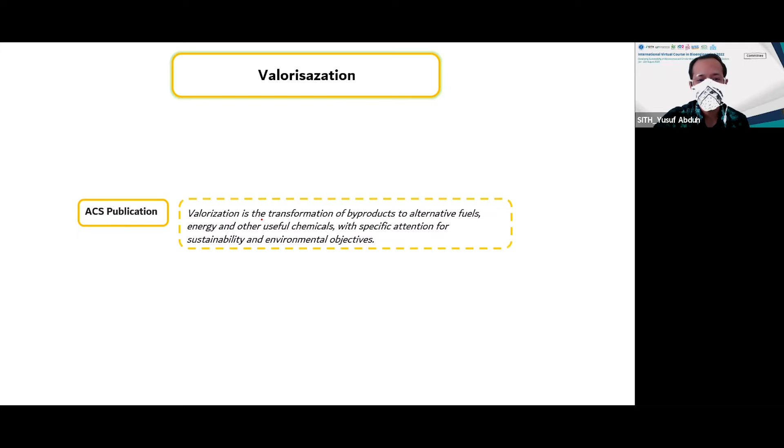It's very good. But the issue is, does it have to be waste? Or can it be other than waste? So the definition by ACS Publications: valorization is the transformation of byproducts to alternative fuels, energy, and other useful chemicals with specific attention for sustainability and environmental objectives. In a way, what Nurul mentioned, to increase the value, is good enough, but it doesn't have to be waste.

It can be, it's the terminology. You can call it waste, you can call it byproducts, you can call it co-products, you can call it also bioresources. So anything that you do by certain processes, biological processes, chemical processes, physical processes, any processes that can increase the value of that bioresource, you can consider it as valorization.

And we have to highlight that the main objective of valorization is to focus on sustainability and environmental objectives. It's not right that you increase the money value of that bioresource but then you are deteriorating the environment, polluting the environment. No. So valorization is increasing the value of certain bioresources with specific attention for sustainability and environmental objectives.

And that brings us to the essential core of this course, biorefinery. Biorefinery is an analog to oil refinery. All of you should be familiar with refinery. In an oil refinery, you have gasoline, you have many petrochemical products derived from the petrochemical industry. Now, for the past 10 years, we are replacing the conventional oil refinery with biomass resources, with biological resources. So we call it biorefinery. We are going to discuss it further.

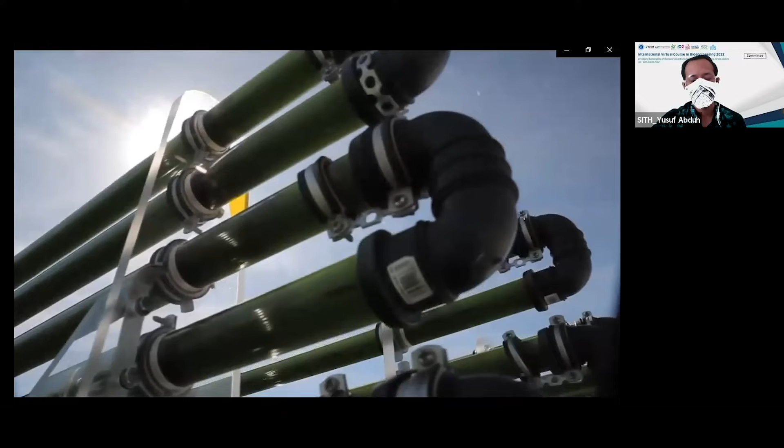We are not going to replace everything. We are going to do things in a different way, in a better way. A bio-based economy uses renewable raw materials instead of fossil resources. I think moving towards a bio-based economy and biorefinery is going to be the real big revolution of our future. Wageningen UR facilitates and accelerates the transition towards this sustainable future economy, which will deploy radically different production methods. Existing and new components for products will be made by a new type of factory. Living plants.

The way we make use of our raw materials and energy is not sustainable in the long term. So we are looking for a new balance where we can use our raw materials and energy efficiently and still create value. At Wageningen UR, we explore the potential of nature to improve the quality of life.

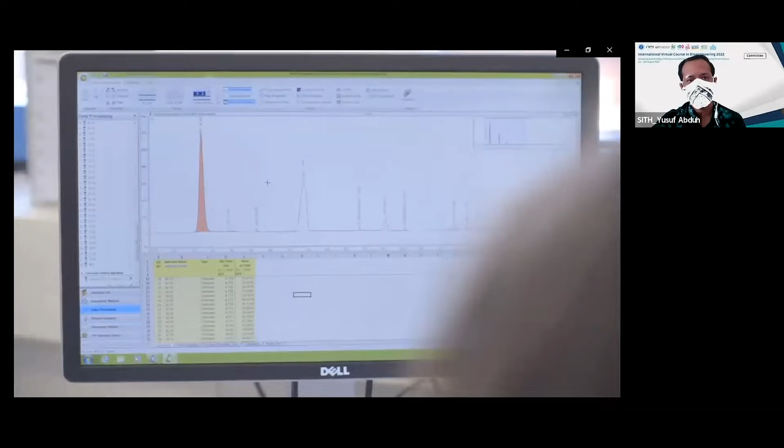Today, most crops are used for food and feed. This means that the plant biomass is not used to its full potential. What we are doing here is that the plant is composed of different components, and each of the components will be used for a certain processing. So we improve each of the components for the process that you are interested in.

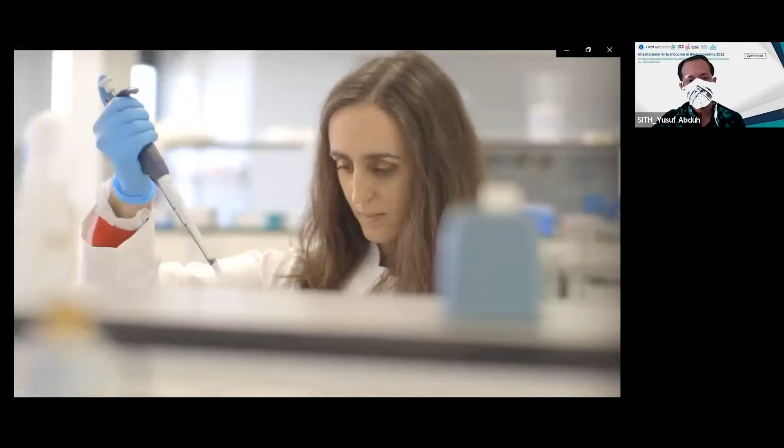There are, for example, fields of miscanthus. It's one of the bio-based crops that is a very high yielding crop. It can produce a lot of biomass with good quality. At Wageningen UR, we develop specific crops that are suitable for biorefining. Using the power of nature, we create the plants of the future. The chemicals, materials, energy, and food and feed.

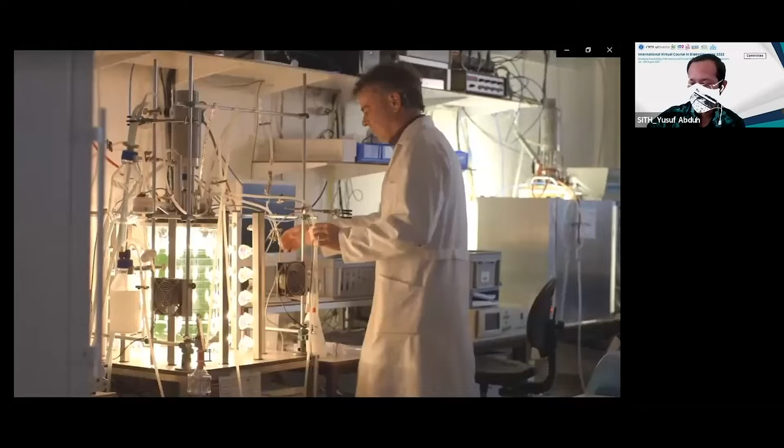Biomass is available from very different sources, in the form of trees, grass, but also waste streams. Biorefinery is important because unless you take the different components out of biomass, you cannot set them in again as raw materials for a different application. For different applications in the market, you need a more or less pure product. So you have to be sure that you separate these components from each other.

Wageningen UR covers a whole range of expertise related to the bio-based economy, expertise on sustainable biomass improvement and production, on bio-based chemistry, on knowledge of food and feed chains, and on economic models. When I think about 10 or 20 years down the line, then of course I think all the materials we're going to use will be very much based on a circular economy, and a lot of that on a biorefinery. I think really we'll see an important revolution that touches everybody's life quite soon, sooner than most people will expect.

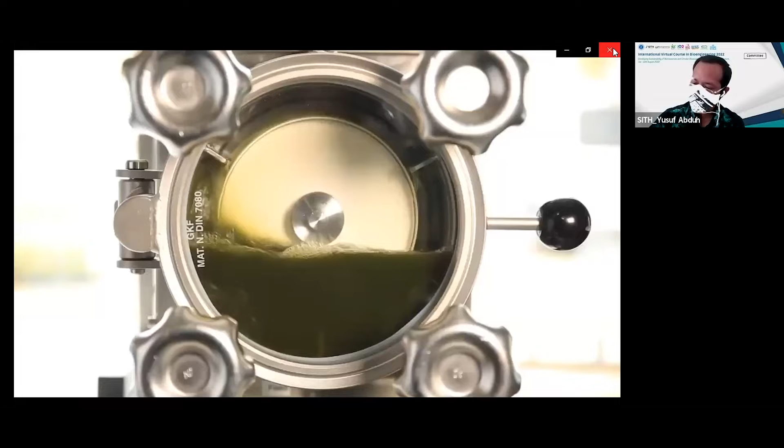Every day, we work with Dutch and global companies, governments and other research institutes. We innovate and develop new technologies in order to fulfill our mission, exploring the potential of nature to improve the quality of life.

All right, so that's around a 3 minute video. Anybody want to comment on that video? What have you heard? What have you watched? What can you take, or the important message from the video? Anyone?

I think, sir, as they are... Sorry, your name is? Firdaus. Firdaus from? From Kashmir, India. All right, Kashmir. All right, okay. So, as

they are propagating the idea of biomass. I'm talking to a lot of people. It's still a challenge for the industry, for people to shift from fossil fuels to biofuels. I've seen recently there are electric tuk-tuks in our society, but they aren't so popular because they cannot move through the rough terrains and all these things. So still the biomass commercialization doesn't go straight away. It's still following a blended economy where you have fossil fuel as well as your biofuels.

And then the problem is again for countries like India, Pakistan, many people sleep hungry. So there is always the food versus fuel controversy in biomass. There are a lot of challenges. It's a good initiative right now to focus on biofuel because the message is propagated that fossil fuels will finish soon, but how far is it sustainable? I still have a question mark on it, because if you look at heavy vehicles which use jet fuels or rocket fuels, there are very stringent requirements. So will biofuels be able to fulfill those demands? It will take time, sir.

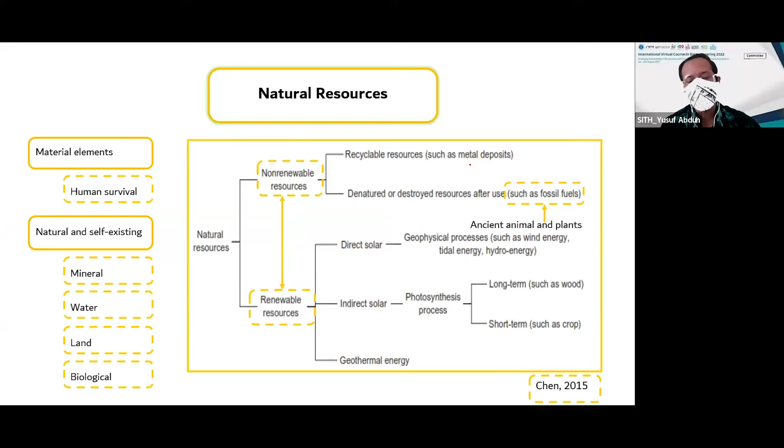Natural resources, I'm not going to talk much about this. You know that there are many natural resources. There are non-renewable resources, and there are also renewable resources. And there are many issues about this that you have discussed on so many occasions. We have exploitation. That's what one of you was mentioning about exploitation.

Yeah, but we also have to deal with excessive waste. Why are we not talking about the waste? Certain countries are facing terrible issues about this waste. How can we minimize the waste, and how can we valorize the waste? And then we also have so many issues about resource quality and how it can be a threat to human survival. If we don't deal with these issues, we are threatening the survival of our next generation.

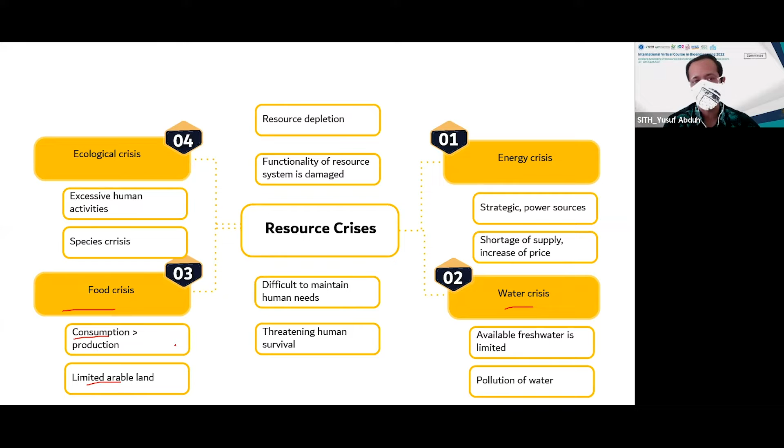We have an energy crisis, we have a water crisis, we also have a food crisis. Maybe in our country we have sufficient food, but we have to know that in other parts within our country or within other countries, there are people who are not having enough food. We have to deal with the issue that consumption is larger than production, and we have limited arable land. There are so many issues that you might have discussed on many other occasions.

And this is just to show you again the global challenges that we are facing: food, water, energy, and everything. And you also have heard about resource recycling. But I just want to highlight the objective of circular economy. Circular economy is related to economics, technology, system engineering, economic development, and environmental harmony. It's not just trading products. It's not just buying or selling products.

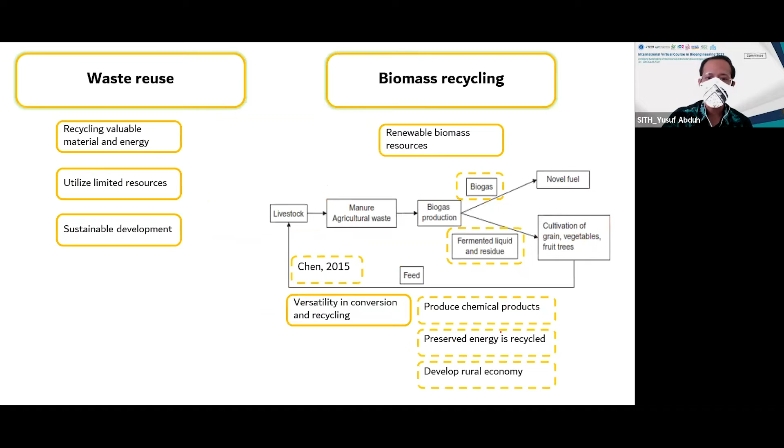Next is biorefinery. As we mentioned before, and some of you have also learned, biorefinery is a wide range of processes coupled for the production of bio-based products from different biomass feedstocks. As I mentioned, it is analogous to the oil refinery. There are four important keywords when you're talking about biorefinery, right?

So it's a very big plant. We have inputs and then we have products, or we call it output as well. So the key points that we have to optimize are the use of resources, the inputs here, and what the potential alternatives for the inputs are.

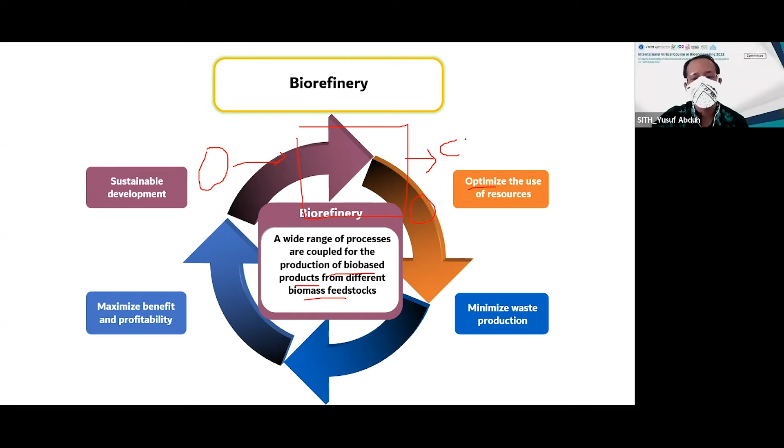We have to optimize the use of resources, and then we also have to minimize the waste, or what we call the byproduct, and then we also have to maximize the benefits and profitability. And all of this is to create a sustainable development.

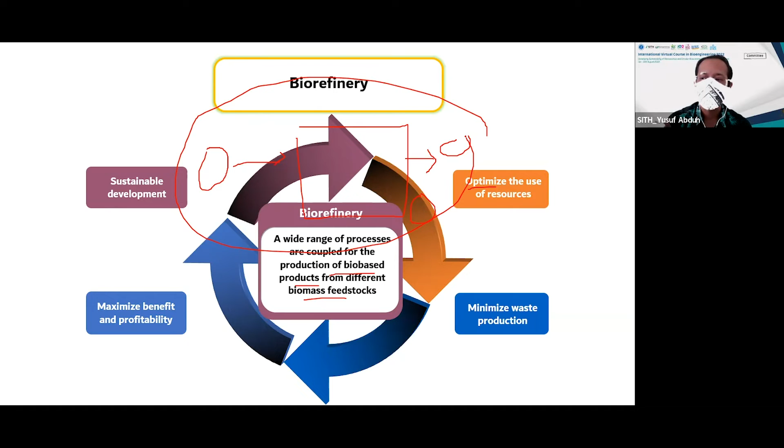There are many issues, yes. It is very challenging, it's a high cost. But let's discuss the concept first, and after we understand the concept, we try to look at what is happening in the industry at the moment and how the industry deals with this. Maybe what we know is not the same as what's happening in the industry. So let's focus on the concept, current application, then we can discuss relevant issues.

Biorefinery engineering, or bioproduct engineering, if you're talking about biorefinery I will show you the textbooks as well. We have different aspects: biorefinery feedstock engineering, biorefinery process engineering, and biorefinery product engineering. Again, we are discussing the concept rather than the issues.

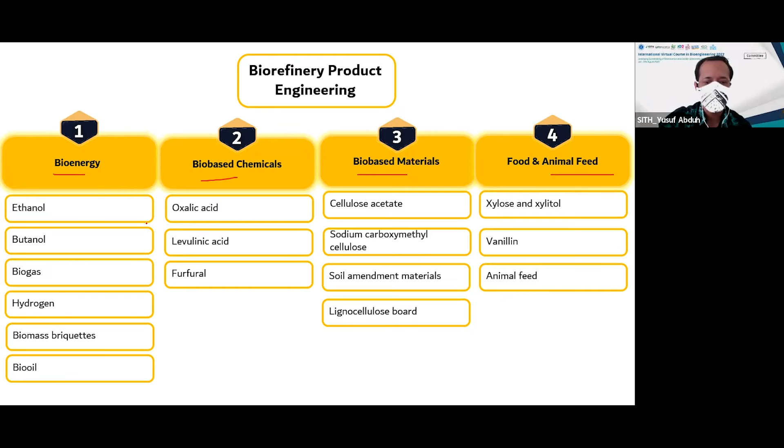We can discuss the issues later. It's very important. We're talking about biorefinery product engineering, and we're talking about bioenergy, bio-based chemicals, bio-based materials, food and animal feed in general. So you can choose, depending on the situation that you are facing. What is the problem that you are facing? Then you can choose this route of product.

And then we move to circular economy, having given a broad overview about biorefinery, and we know biorefinery is related to industry, and we have to talk about economy. Unlike linear economy that you might be familiar with, which is take, make, dispose. We take something from the environment, we make the product, and then we dispose of the waste. That's what we call linear economy.

But in circular economy, it is an industrial economy that promotes greater resource productivity, aiming to reduce waste and avoid pollution by design. So you have to design the process. Circular economy doesn't happen without intention. It has to be designed, and we have to take into account the material flows.

There are two material flows: technical nutrients and biological nutrients. Biological nutrients are designed to re-enter the biosphere safely. If you take everything from the plant, from the environment, and don't return it back to the environment, then there will be a deficiency of nutrients in the environment. So some nutrients, what we call biological nutrients, have to be given back to the sphere.

But the important key here is safely. You have to return it back to the environment. It's not fair that you take everything and don't give back. As a human being as well, when you take something, you need to give it back.

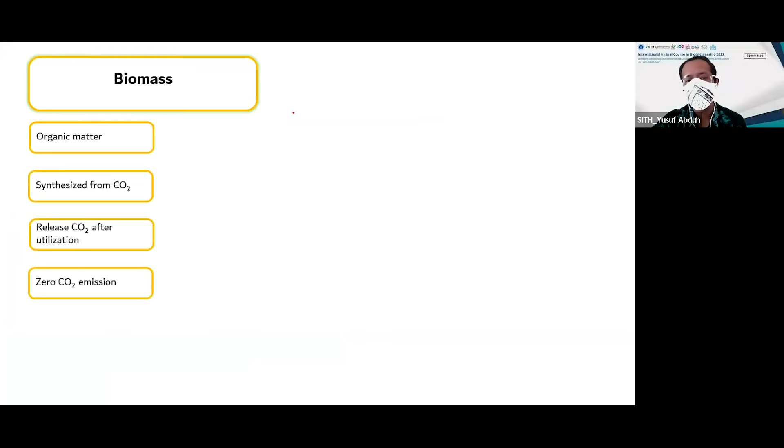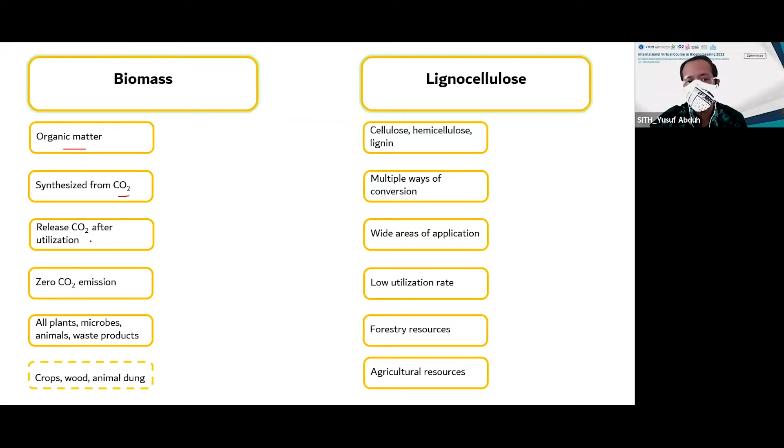So the main source of biomass - yesterday Professor Gill was talking about the source. One of the sources is lignocellulosic bioresources, lignocellulosic biomass, because lignocellulosic bioresources is the most abundant resource on Earth, available for us. But then there are also many issues about lignocellulose. Biomass is basically everything that contains organic matter, from carbon dioxide, but then it releases CO2, so it has zero carbon dioxide emissions. And lignocellulose is the most abundant resource on Earth, that's why many research efforts are focusing on it. But there are also a lot of issues - how can we deal with homogeneity and consistency of product when dealing with lignocellulose?

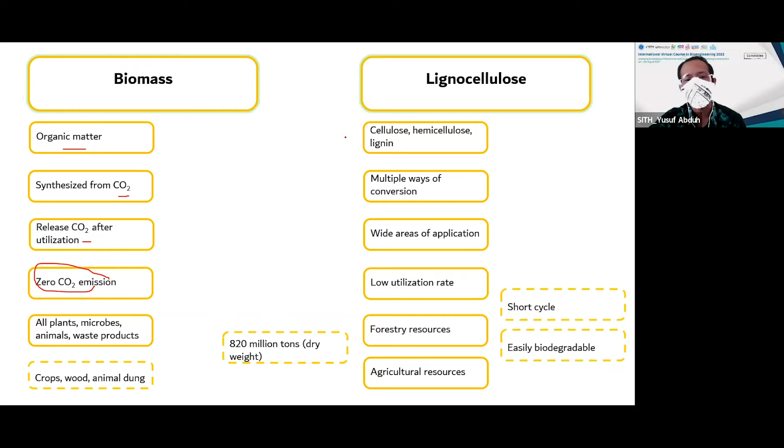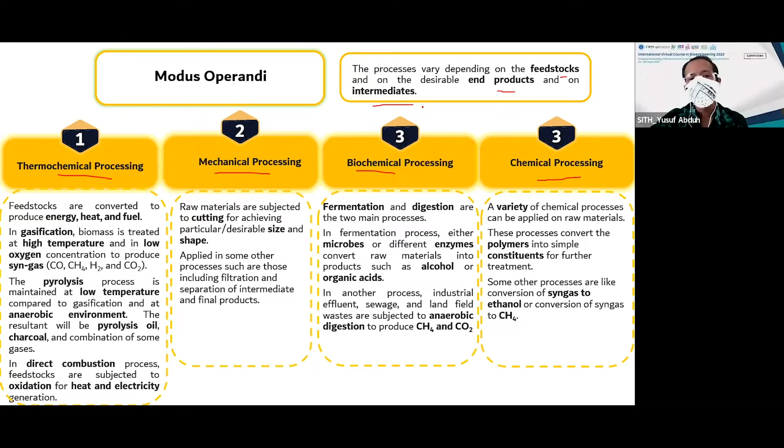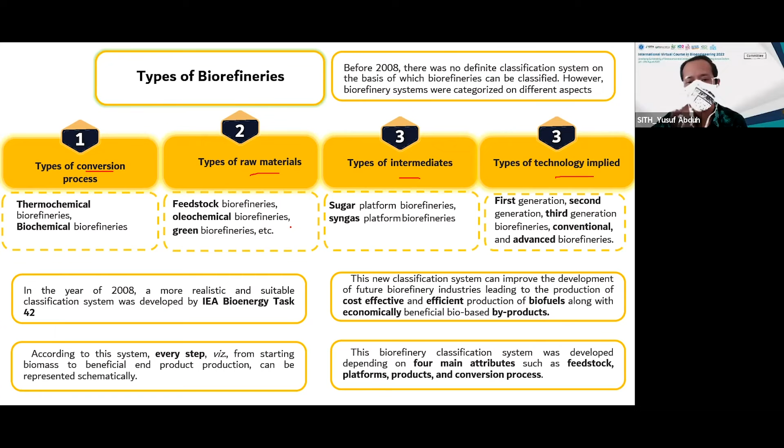Now we move to the modus operandi. We are talking about the biomass - how can we process it? It's the core of the biorefinery itself. We can use thermochemical processing, mechanical processing, biochemical processing, and also chemical processing. This is just to show you in general, it depends on the feedstocks, the end products, and also the intermediates. The type of biorefinery can be categorized by the types of conversion process, types of raw material, types of intermediates, and types of technology applied. So you can define or categorize biorefinery depending on these types. This may be familiar to you, for example with starch crops - these are the processes you can do for fractionation, then biological processing, and at the end we have the product.

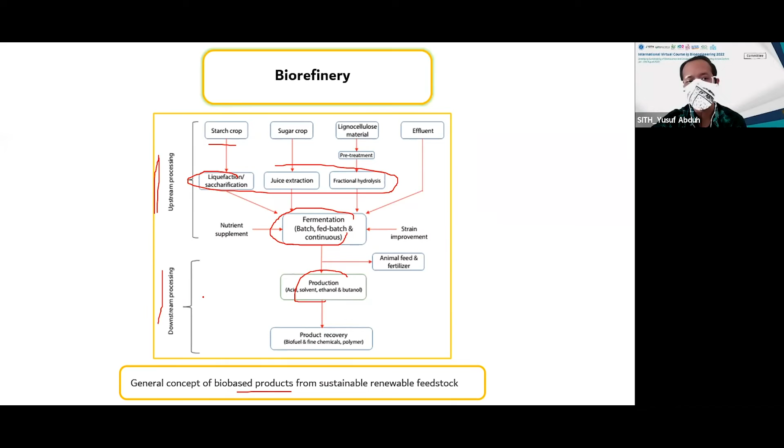So in general we have the upstream processing and also the downstream processing. This is a general concept of bio-based product from sustainable renewable feedstock, which can be categorized into upstream processes, dealing with the biomass and preliminary treatments, and then we have the processes. After the processes, we have downstream processing for separation and purification to obtain the final product.

Any questions so far?

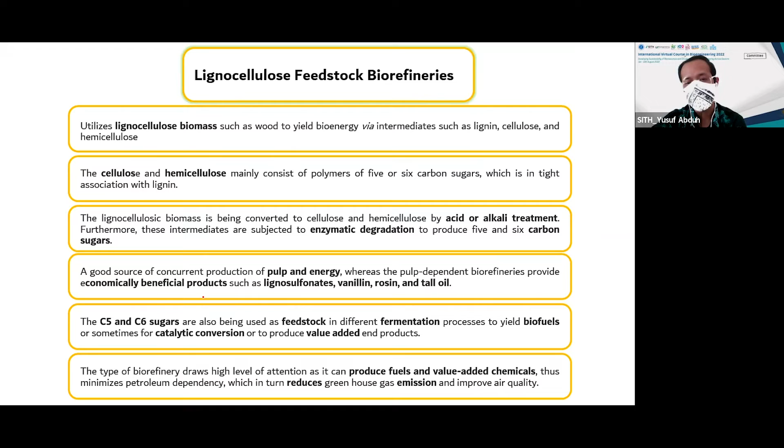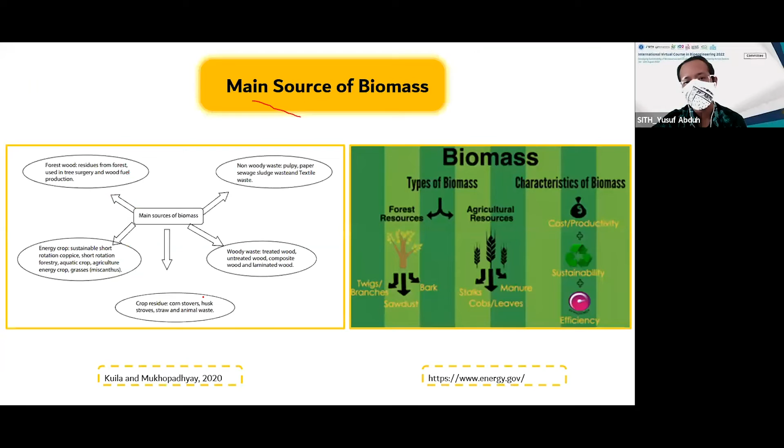Sir, I would like to discuss the concept of circular economy, specifically in the bio industry. As we know, circular economy is about responsible production and consumption, as promoted in SDG number 12. We do this considering the life cycle of the product - it's a circular cycle, not a linear economy like the traditional one we may use.

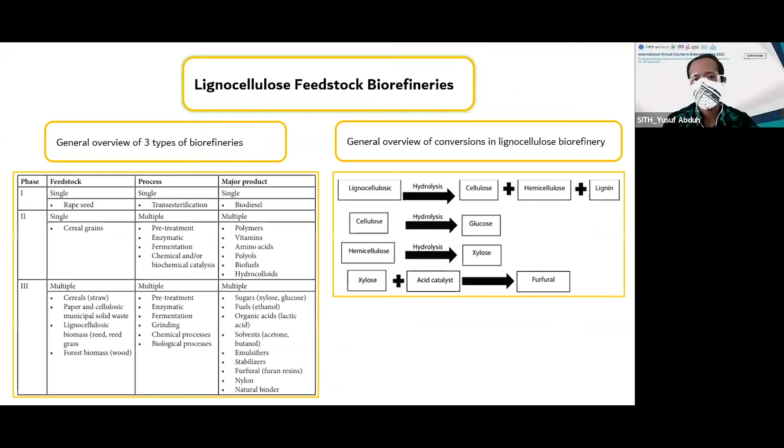Talking about the process just now, we stop here, and we have this lignocellulosic biomass. I'm not going to discuss this because Professor Gill has given a very thorough discussion about lignocellulose. But why? Because lignocellulose is the most abundant resource on Earth right now.

Apart from the lignocellulose biorefinery, we have the syngas platform biorefinery. Syngas mainly consists of carbon monoxide and hydrogen. How can we use fermentation?

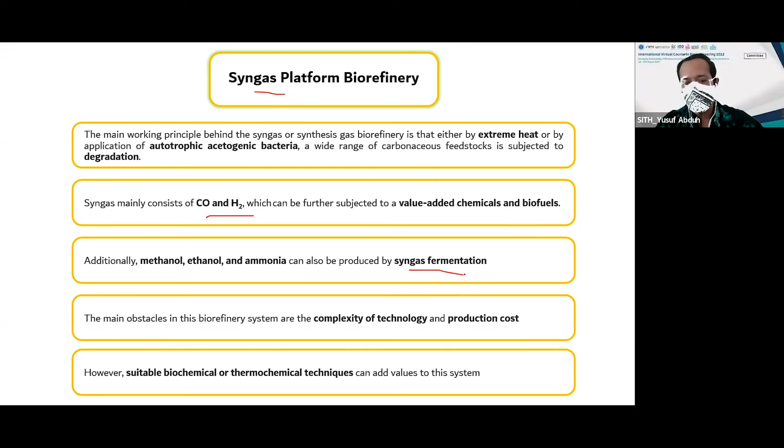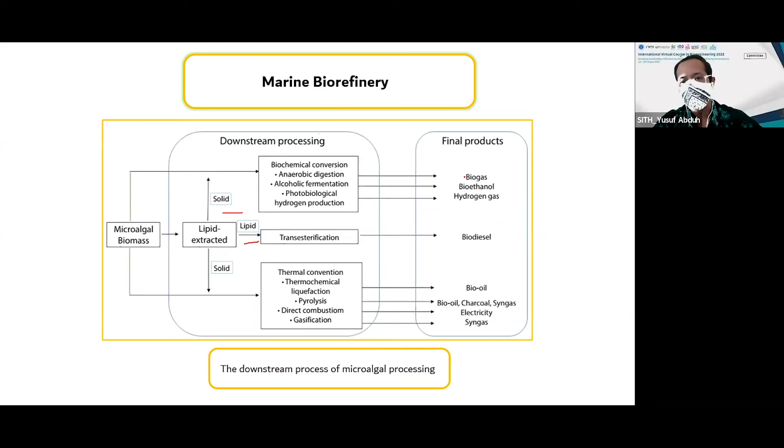So this is just an example, the microalgae biomass - we have the extraction process, and we have the solid, we have the lipid, and these phases can have different processes leading to different final products. This is just a concept, and later I will show you companies that have done this in real.

We have also here this oleochemical biorefinery, so these are producing oleochemical products.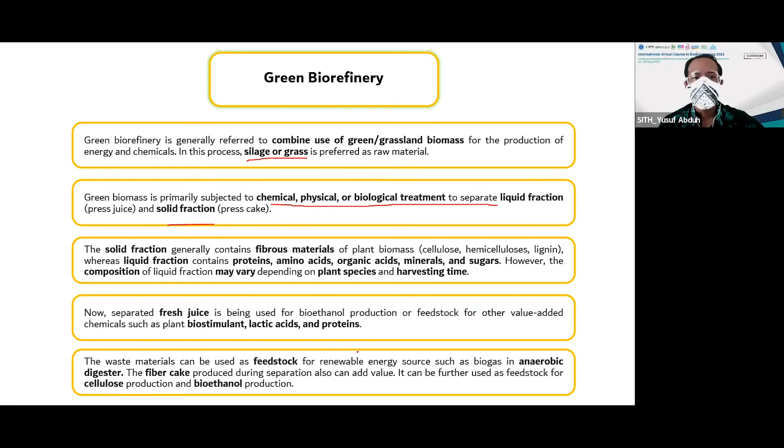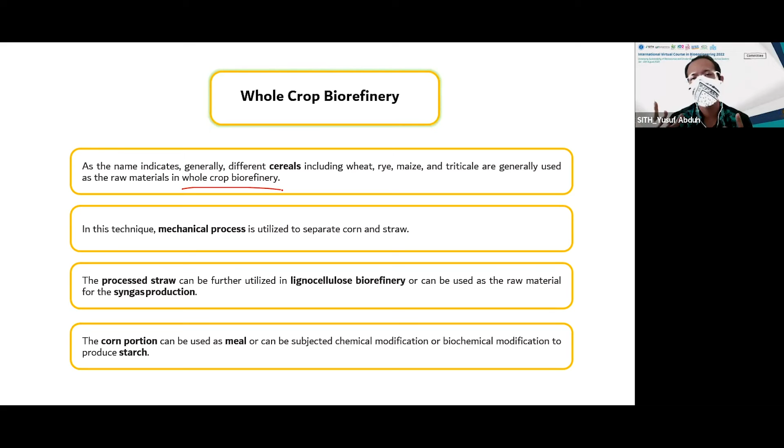And we have here what we call the whole crop biorefinery - for example, cereals including wheat, rye, maize, and triticale are generally used as raw materials in the whole crop biorefinery. Again, this is to show you that we have different types of biorefinery. If before this you only knew biorefinery as optimization, minimizing waste and maximizing benefits, now you know we have whole crop biorefinery, marine biorefinery, green biorefinery - the different types of biorefinery.

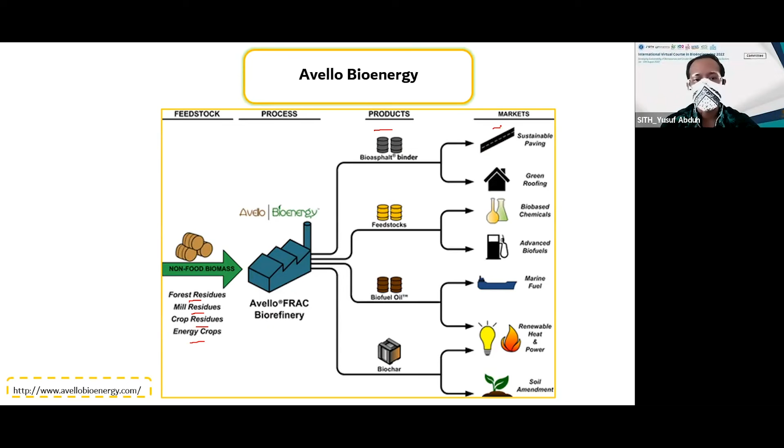So my point is that food versus fuel is very important. Many companies, especially in Europe, have outlined that renewable energy, particularly biofuel, cannot be derived from food sources. It has to be from non-food sources. That's the current issue: we have this Japanese company and Dutch companies coming to Indonesia. That's the case of Indonesia. Perhaps in Thailand, the Philippines and India it is different. Maybe you can tell your stories on that. Avello, for example, uses forest residues, mill residues, crop residues, and energy crops to produce different products for different market segments. This is Avello Bioenergy.

All right, next is the principle of sustainable biorefinery. Before we discuss these principles, does anybody want to ask questions or discuss something?

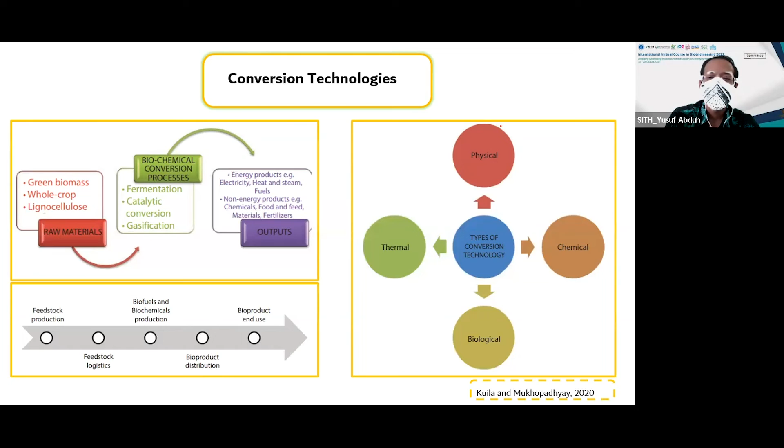No? If there is no question, I should continue. After this, we can go to your questions, if there are no questions from the other participants.

I just want to highlight this because this is very important. Which companies do we consider as biorefinery companies? Those companies that are in accordance with the IEA Bioenergy Task 42. What does it say? The sustainable handling of biomass into a spectrum of valuable products and energy is known as biorefining. This is what has been outlined by the IEA Bioenergy Task 42. It has to be sustainable handling. So yes, there are lots of issues, but if you're talking about biorefining, at the end, you're talking about sustainable processes.

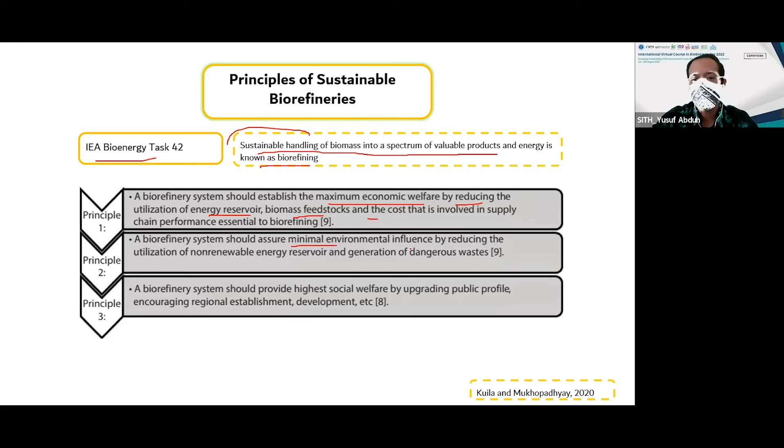Principle number one, a biorefinery system should establish the maximum economic welfare of the society by reducing the utilization of energy reservoir, biomass feedstock, and the cost that is involved in supply chain performance. A biorefinery system should assure minimal environmental influence by reducing the utilization of non-renewable energy reservoir and generation of dangerous waste.

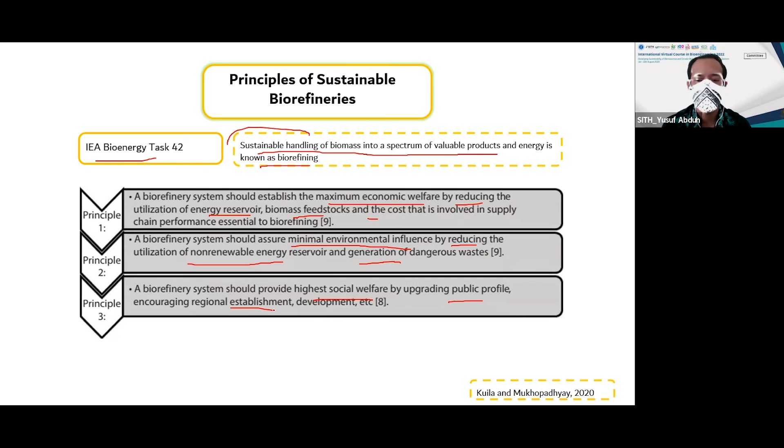A biorefinery system should provide highest social welfare by upgrading public profiles, encouraging regional establishment and development. So, biorefinery is more than just processes. It's focusing on the economic welfare. It's focusing on the energy. It's focusing on the environmental influence. It's focusing on the social welfare as well. So these are the three principles of sustainable biorefinery. And then we also have this sustainable chain management, beyond the three principles.

They have another four: should fulfill the market needs, should not conflict with food supply. So we would not have this food versus fuel if we really apply this biorefinery principle. Should have an economical biomass to product supply chain. So it's no use producing products that at the end are not able to compete in the supply chain. Should have good conversion productivity.

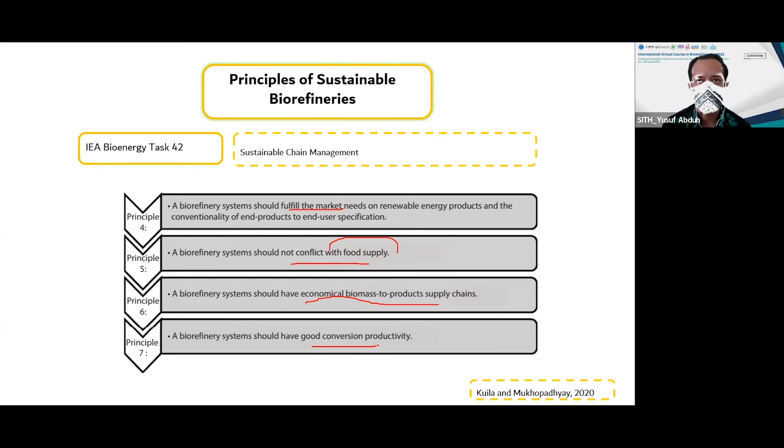So of course, these are principles. You can achieve this or not. There are various issues that need to be discussed. But just to let you know that biorefinery is guiding us to a better environment. Is it 100% realizable? No. There are many issues. Of course, some of you have mentioned some of the issues, and there are many other issues.

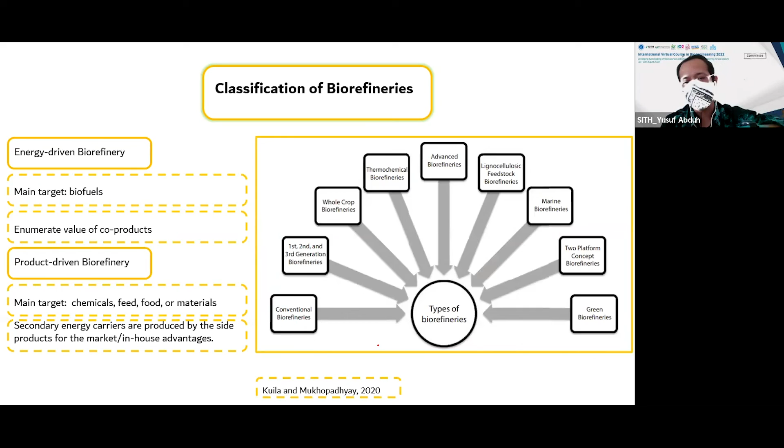All right. So types of biorefinery, we are trying to look at different perspectives, and then this biorefining in a circular economy. So that's why in the beginning we are discussing these together. We are not talking about biorefinery and circular economy separately. We have to discuss this together, and this is as outlined by Task 42, biorefining in a circular economy.

So as I mentioned before, energy is very crucial in a production system, and we are trying to reduce as much as possible energy from the outside by producing your own energy within the system, to reduce the cost and also to ensure the stability of the entire process.

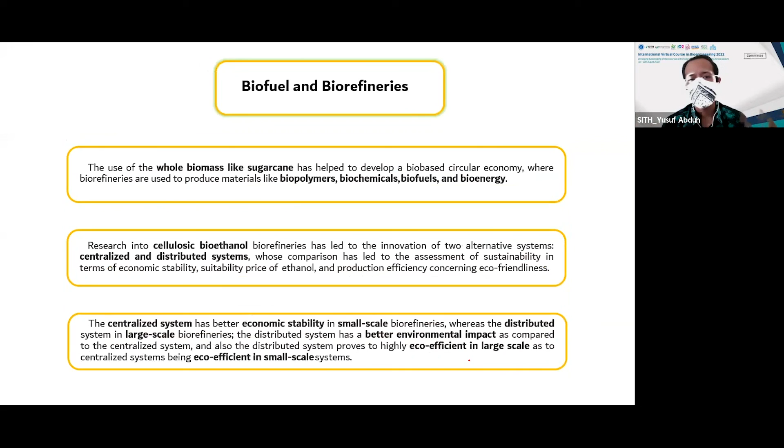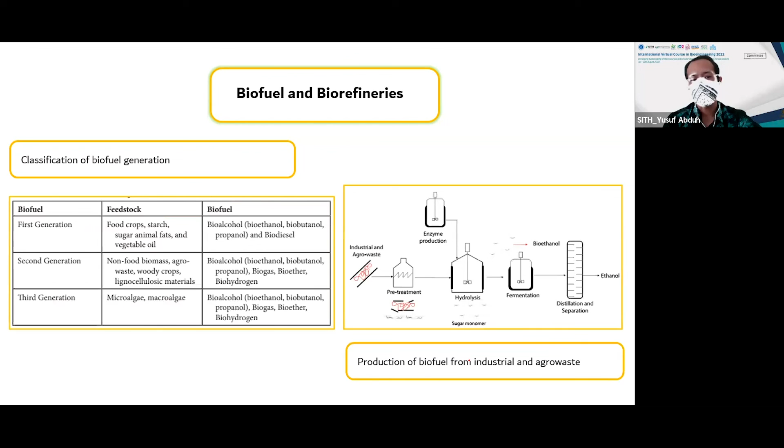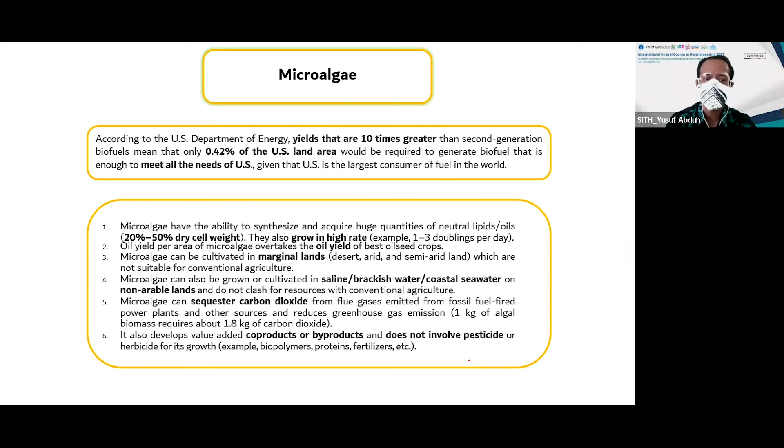I think I've almost finished here. There are many slides in here, but I think we are not able to discuss everything. I prefer that we discuss more on what you find relevant and what is the problem that you're dealing with. But just to show you that there are several issues about biofuel and biorefinery. These microalgae are very interesting to show here because it is also related to your economic assessment. For your collaborative project on preliminary economic assessment, I want to show you what we have for the microalgae.

We can go through all these processes. What I wanted to highlight here is the value addition of microalgal biomass per 1,000 kilo in a biorefinery. So we can see that the microalgae can produce lots of products, and these have different chunks of this pie. So you can see we have food proteins, feed proteins, sugar, phycoremediation of nitrogen, oxygen, chemicals, and biofuels.

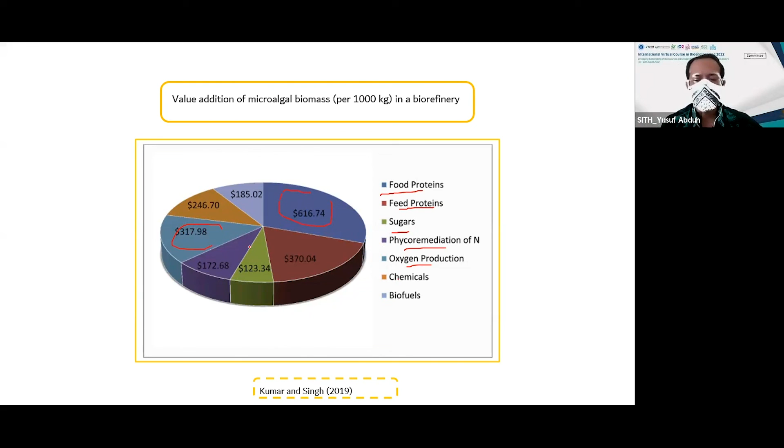And you can see here how we have to pay attention to the different chunks that have high values, and biofuels is not the highest. So the current issue with valorization of algae is the cost. So we are not producing only one product, but several products to really cut the cost by having income from different products.

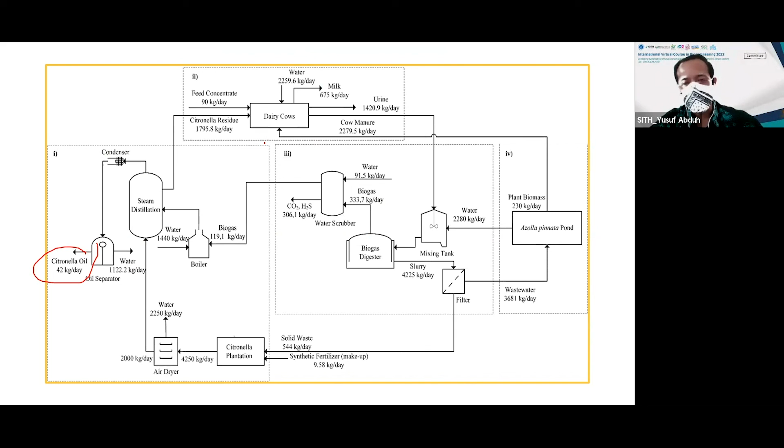For example, this shows citronella, where we can produce citronella oil and different products from citronella plants. And for coffee, how we can increase the production of coffee by integrating with stingless bees. By integrating the coffee plantation with stingless bees, you produce not only coffee beans, but also propolis and honey from this process.

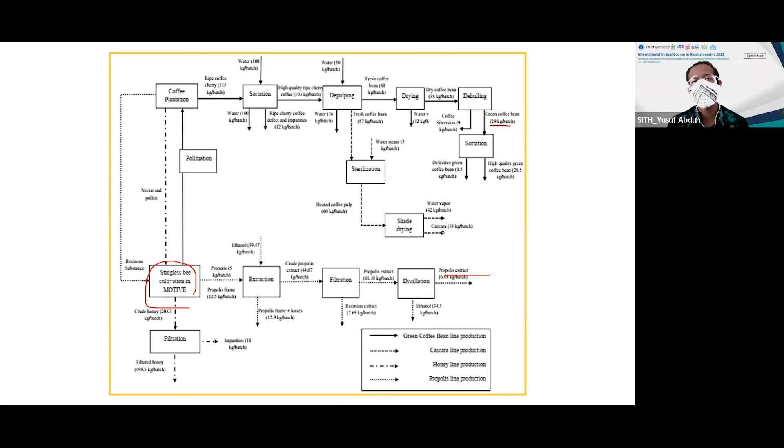These are just examples of how you can integrate processes so that you have more technical nutrients available within the system, and then make use of those technical nutrients to produce as many products as possible.